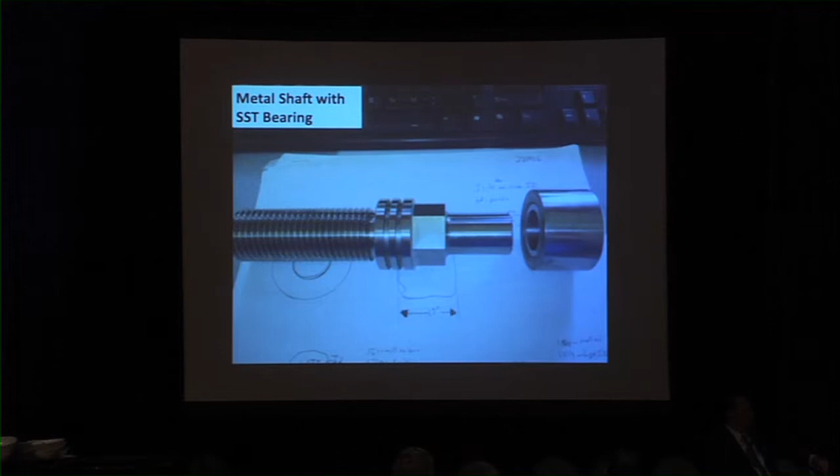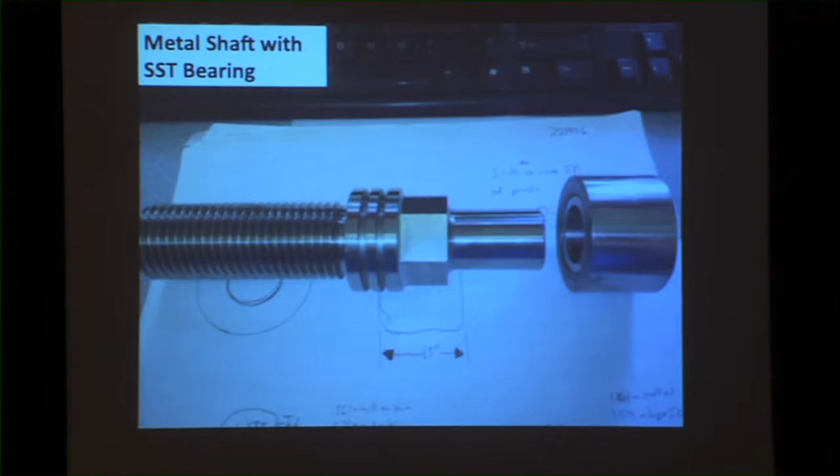Here you see the Ketron MD metal-detectable bearing solution, a 304 series stainless steel shaft with a two-part bushing component. This is a close-up of the 304 series stainless steel shaft assembly, showing closer edge detail of the two-part bushing assembly. The customer was using a two-part bushing assembly specifically to try to increase the extended part life as much as possible.

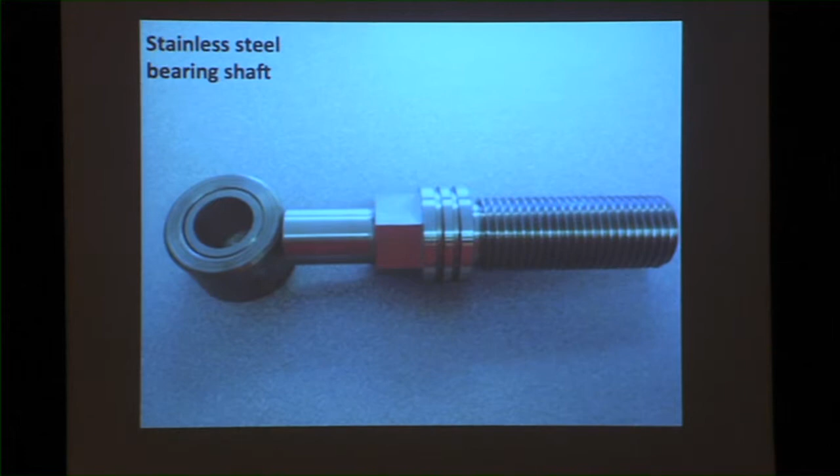They were having premature failures earlier with the bushing due to fusion welding because it was not lubricated. This application was a higher temperature under load, running continuously without lubrication and using similar 304 series stainless steel. Thus, the two-part bushing was an attempt by the original manufacturer to get longer life. That did not work. Here you see a typical two-day failure, which happens when two parts fail and fusion weld, causing assembly failure. This creates a lot of damage downstream, as well as food contamination from metal. This was also a primary reason for the requirements for plastic components.

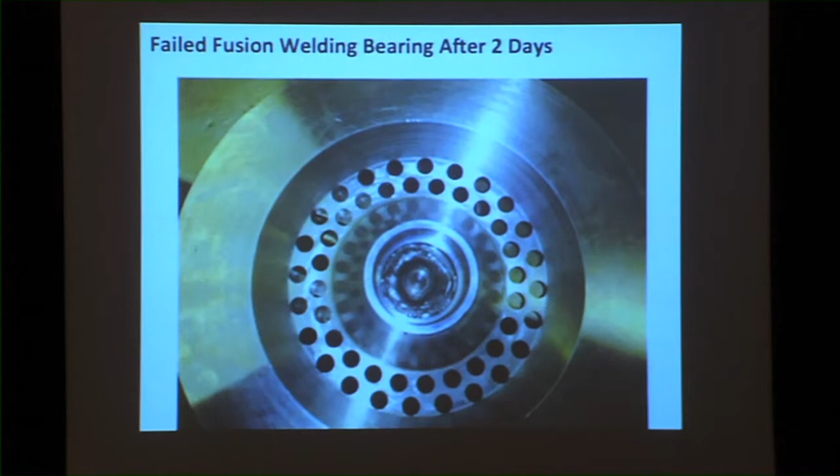Here you see a similar 2-day fusion welding failure of the same current metal component.

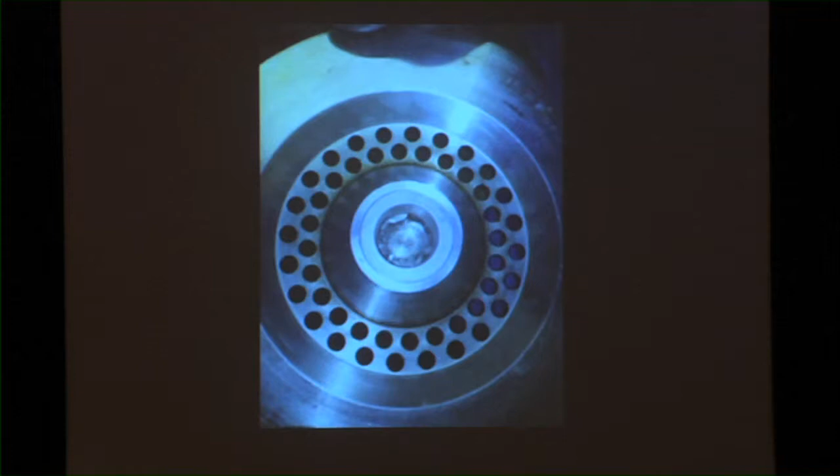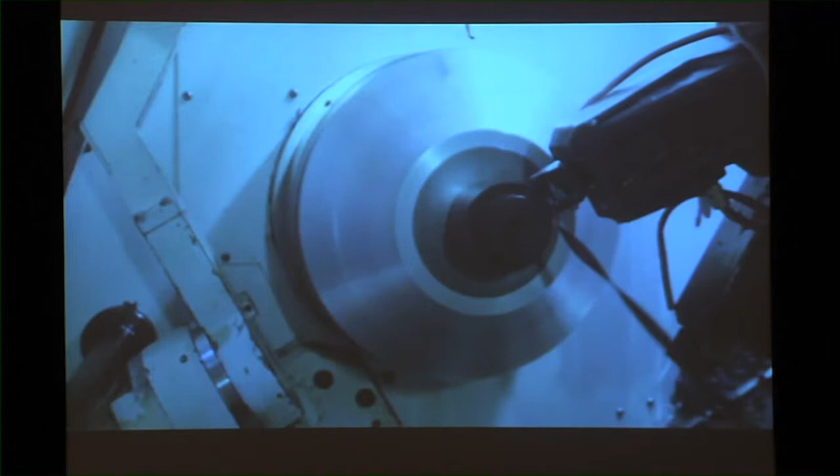The video here is showing fabrication of our existing plastic bearing assembly. This part is used by a food producer that has now developed a food product for the US and many underdeveloped countries. The food product developed using this processing system has substantially benefited the world market.

Exact parameters of the application were researched by the sales engineer to meet the customer's exact requirements. Requirements we had to meet for this application are the following: metal detectable material, FDA compliant, very heavy loads, temperature requirements to 375 degrees Fahrenheit, unlubricated, and a minimal mating component to limit wear as much as possible.

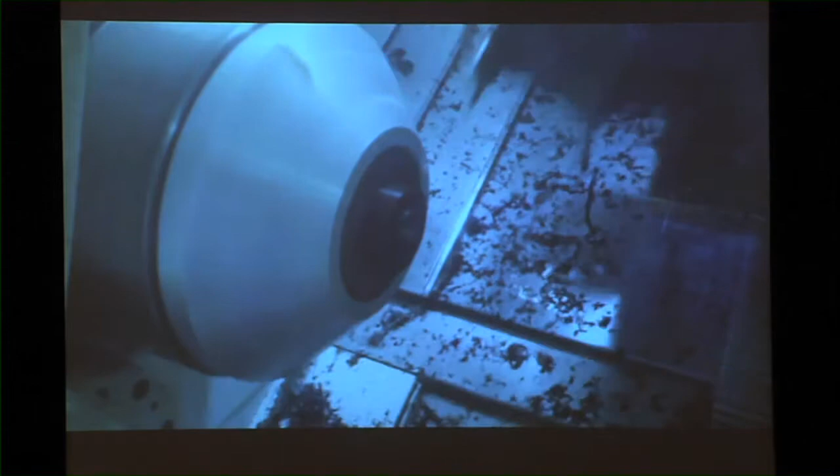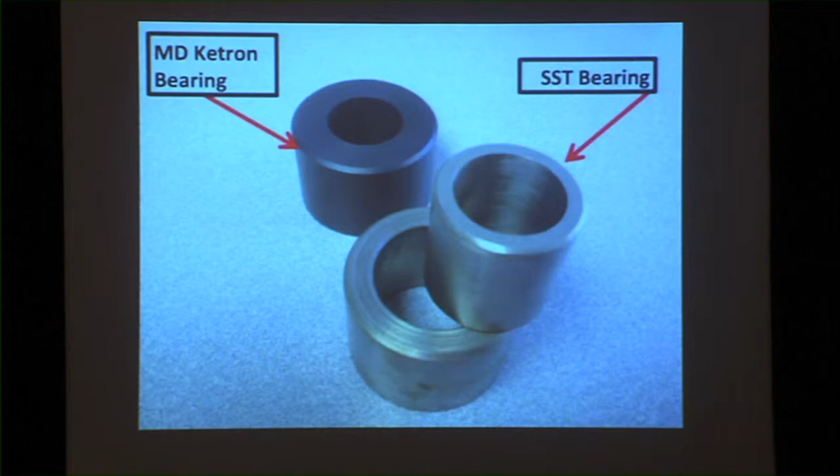This is a detailed close-up of both metal and polymeric bushings, again showing the detail of the one-piece assembly versus the two-part metal assembly.

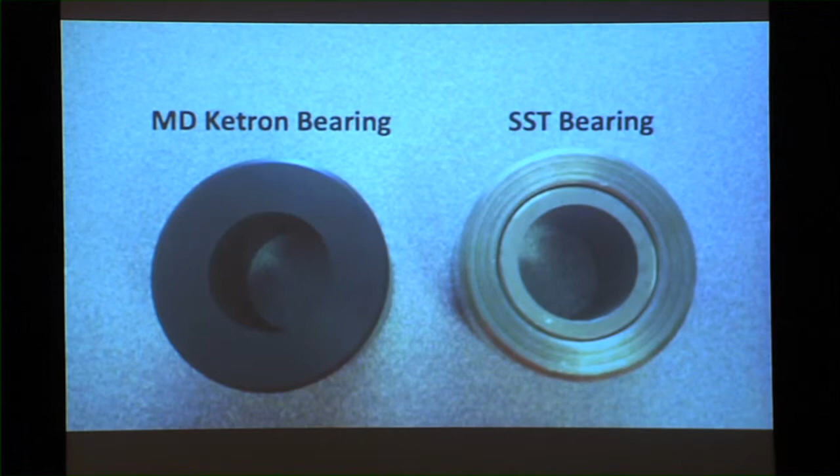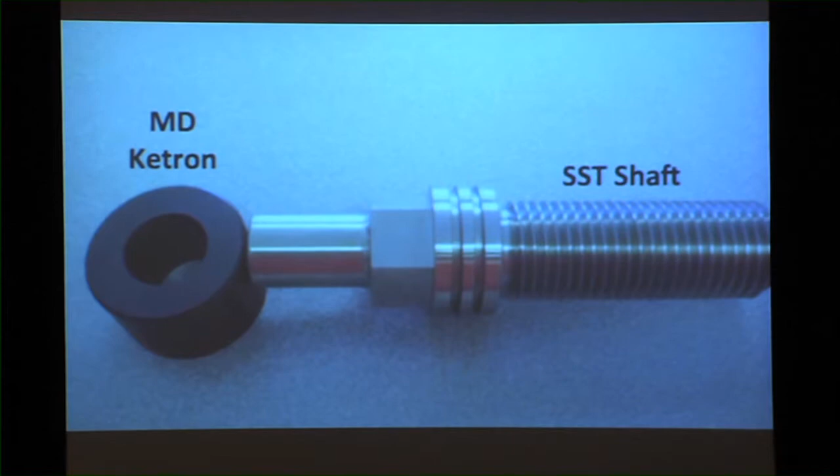This is our first prototypical Ketron bushing with a stainless steel shafted component that is still in service. Here you can see our current polymeric bushing and the metal assembly with the shaft and the current design bushing assembly.

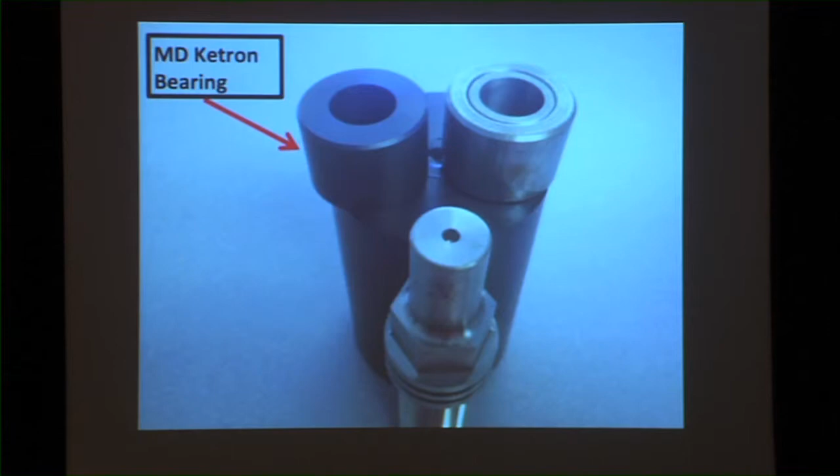Sample material came from Jim Evel at Quadrant, which at the time was the only material available in North America to test the material out of.

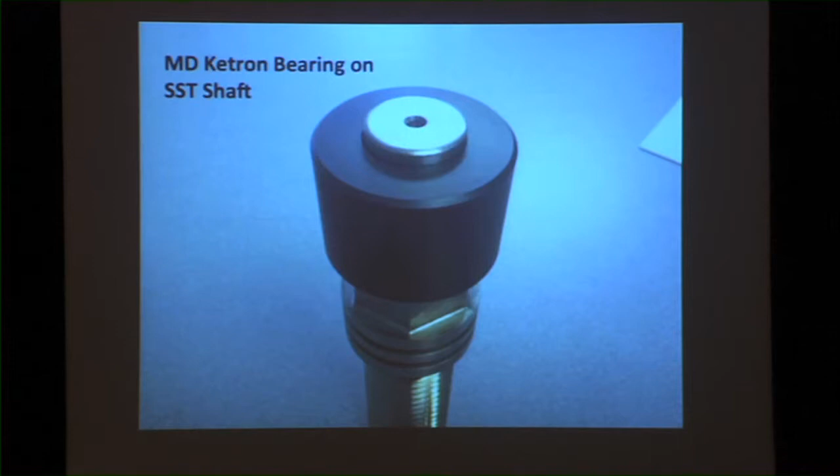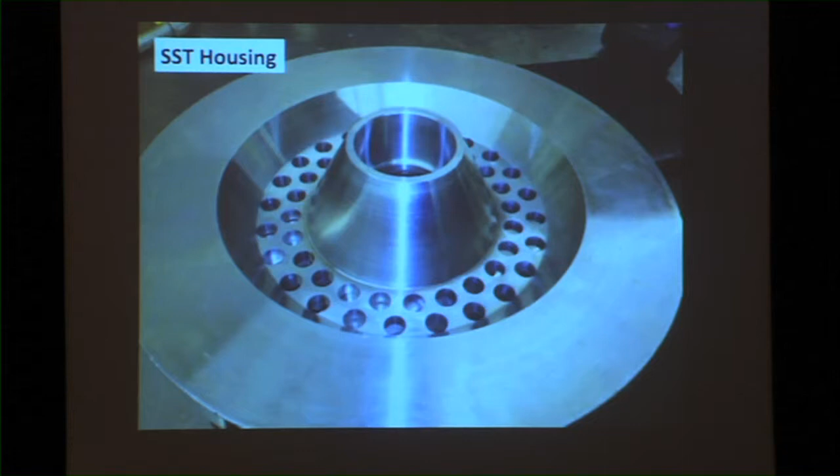The picture here is showing the polymeric detectable bushing test fit. This is when we initially made it and tested it to the stainless steel shaft to see how the fit was for the interferences. Shown here is the stainless steel housing and the end of the extruder nozzle that the assembly goes into, which is also the same extruder assembly that was shown in the failures earlier.

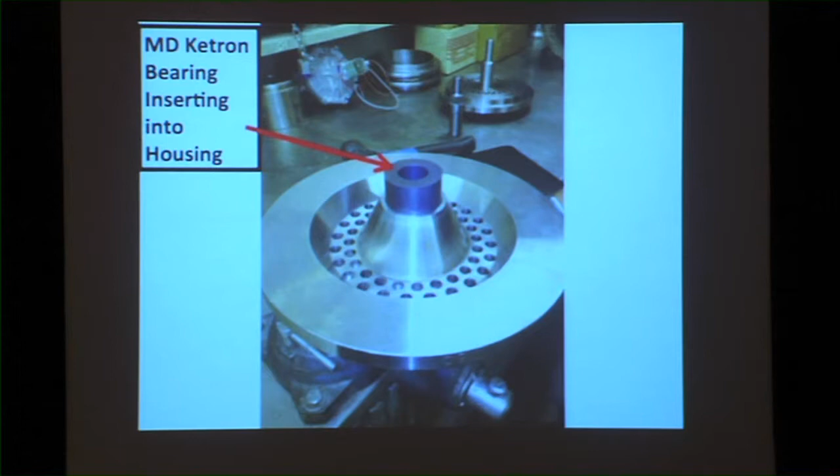This is the day we actually tested and press fit the bushing into the extruder assembly. Here we are testing that the press interferences were correct. Here we show the press actually being fit at the time. It went in with the correct amount of interference press fit, so the bearing would not spin in the steel housing.

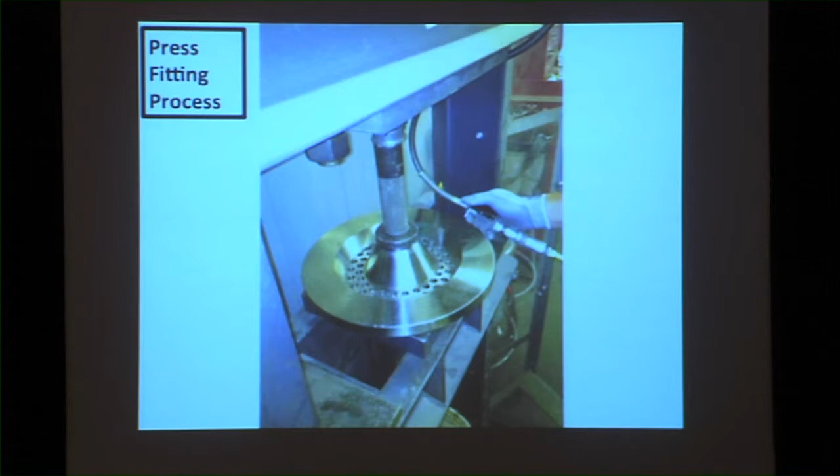Here is the bushing after being pressed in. The interference was correct with the amount of press fit tolerance on the OD of the component, as well as the ID as it goes into service.

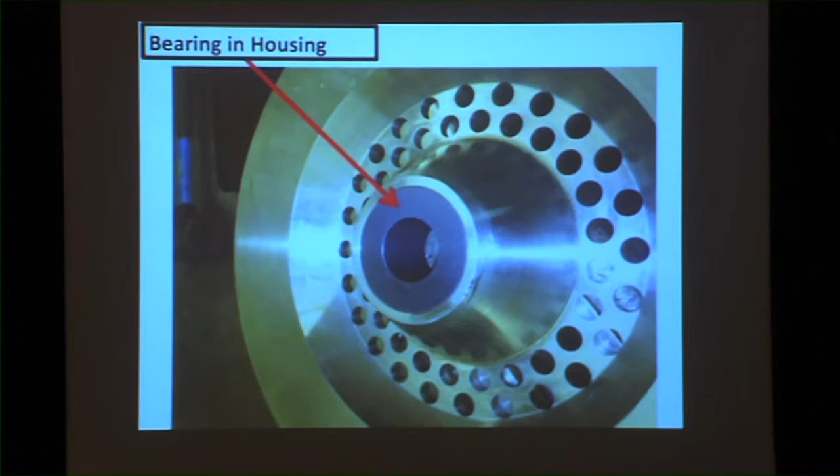Finally, we are showing the stainless steel shaft as it is being put down into the bushing to make sure that the interference on the ID was correct, giving just the amount of proper running clearance. Even though this was shown at ambient temperature, it was also calculated with the thermal expansion factor for when it is actually running at the elevated temperatures.